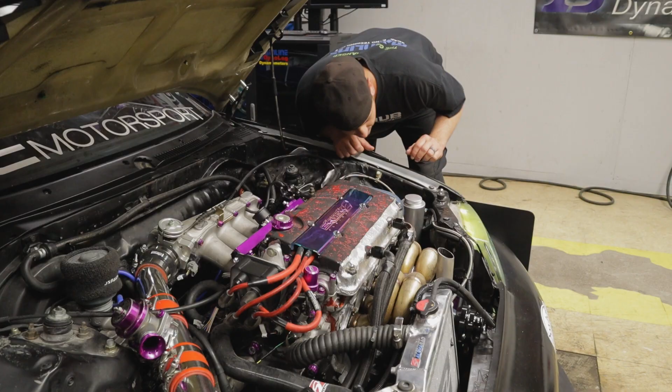Alright, so this is a Turbo B series, Hondata S300. What makes this one a little bit more interesting is it is a time attack car, so it needs to be able to go around a racetrack for extended periods of time, not just down the drag strip. And it is 12.5 to 1 compression with stock sleeves. So hopefully we can do all of this without shooting the crankshaft out of the bottom of it. Boost controller's mounted over here and ECU's over here, so just gonna run a couple wires over there real quick.

So inside the car, the boost control is going to go to A11 for the ground side, A25 for the power side, and then the wideband is going to go to D14. You can't really see in here, so I'm just going to hook a couple wires up real quick. Alright, everything's all wired up. Let's test it, make sure I didn't screw anything up. Battery's dead. Hopefully you can hear it pulsing.

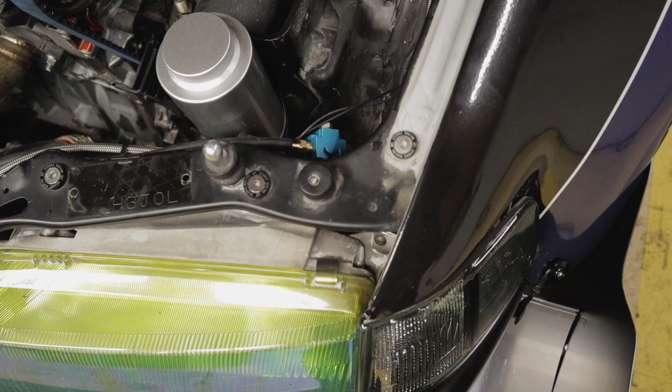Alright, I guess we'll drain the fuel, throw some E85 in it, and make sure it starts, runs, all that good stuff. And I don't think I'm going to have enough time to finish this today, so I might move the dyno forward, maybe. Yeah, I think I got another Honda coming next, so I'm going to move the dyno forward, get it set up on the dyno, hopefully get started on tuning it today, and then probably finish it up in the morning. Looks like the distributor is 20 degrees out too, so maybe we'll set the timing first. Yeah, let's drain the fuel, throw some E85 in there.

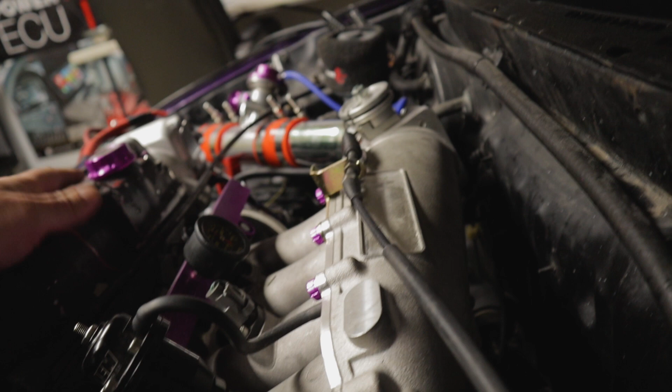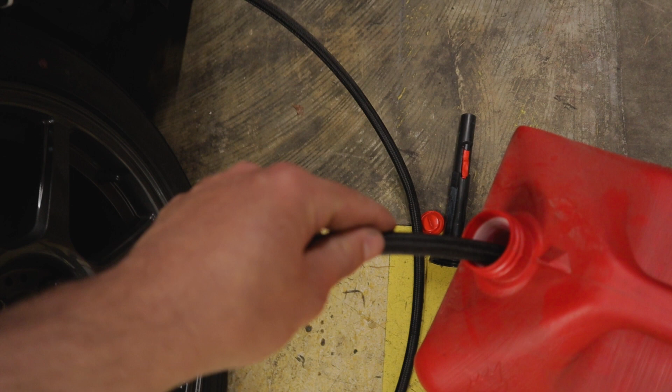I feel like I have $100,000 in lines and fittings that I just used to drain gas tanks. I'm not really a big fan of fuel pumps being on switches. I prefer for the ECU to control it. This one is on the switch, and it's going to be super convenient for draining the tank, minus the dead battery. Sounds weird. Kind of sounds like a dog drinking water. Alright, we'll just let this drain and then throw some E85 in there, see if it'll start. Stinks.

Alright, I'm going to try and start it now. It's got obviously the E85 in there. Change the fueling, change some idle settings, change a bunch of other crap. I don't know how well it'll start and run because all the fuel lines and stuff are still going to have 93 in it. And even when you drain the tank with the pump, there's still a little bit of residual 93 in there.

So locally, most of the E85 has been testing about E70 because of all the stuff going on in the world, and then we have only 5 gallons of E85. So probably in, I don't know, the E60 range. So assuming it'll start and run, might have to give some throttle, keep it going, but we'll dial it in once it's up and going. So let's see what happens.

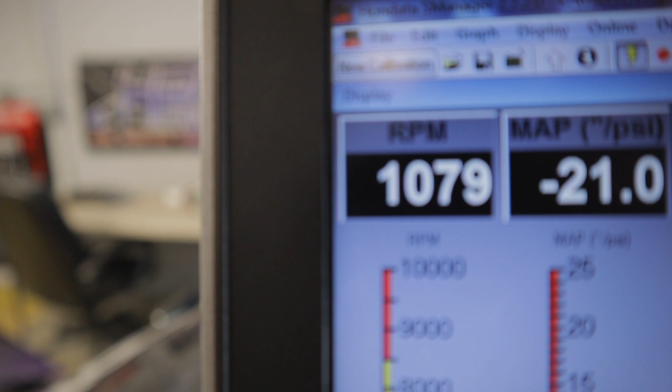So far so good. That was easier than I really expected. Just changed one fuel setting and then everything was up and running. So the fuel is definitely not quite as close to E85 as I'd like, but kind of is what it is. Now I'll move some stuff around, move the dyno, set it up on the dyno, and we can start tuning for real.

The 5-volt output for the wideband doesn't seem to be working. If I had to guess, there was a couple of gauges that all had kind of the same output wires. I probably somehow managed to grab the wrong one. So I'm going to check into that real quick. And hopefully I just got to swap one wire. Yeah. Yeah, so it turns out I'm just a moron. So everything's working now. Good to go.

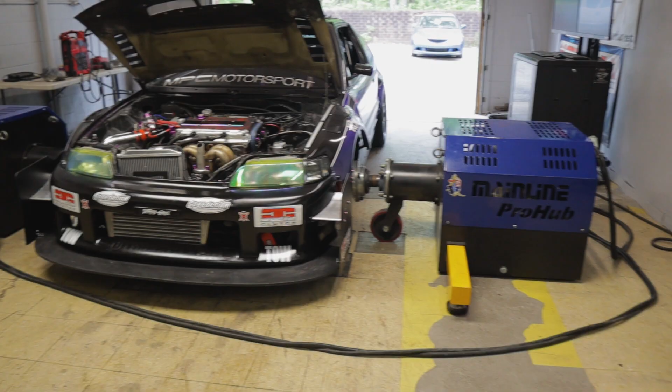Probably not going to be able to fit a jack under that. Alright, got it all set up. Next problem is this hood is so flimsy. I'm pretty sure that the dyno fan is just going to rip it off the car. So in an attempt to keep it alive, I'll take that off and just set it off to the side. Better safe than sorry, I guess.

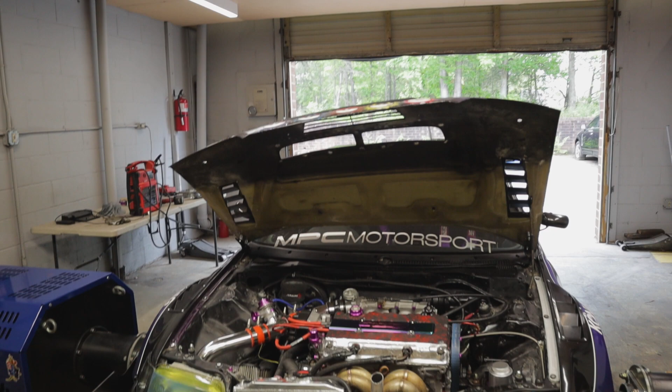So I actually don't physically fit in this seat. I can kind of wedge myself down in there, but then my legs are so cramped together I can't move them and I can't use the pedals and stuff. So I'm not 100% sure how I'm going to do this. I almost need to hire somebody that's super skinny for the day and make them drive it. Yeah, this should be interesting. Guess I forgot to mention it's right-hand drive too.

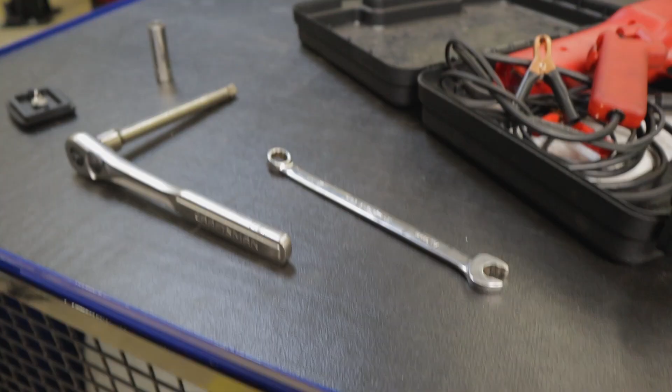Step 1. I'll go ahead and loosen this while I wait for my piece of junk computer to start. Everything's harder with one hand.

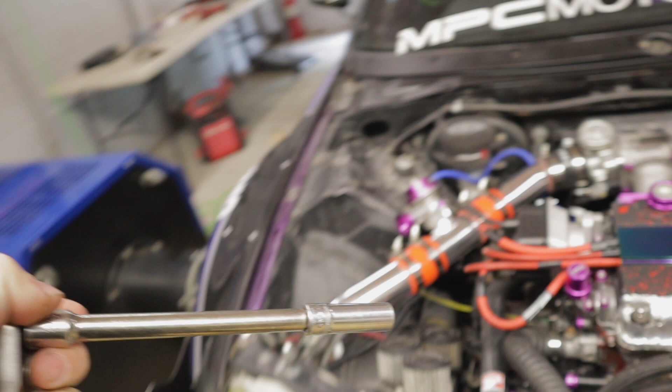It's illegal to put anything 13mm on a Honda. I have to call the FBI. No good.

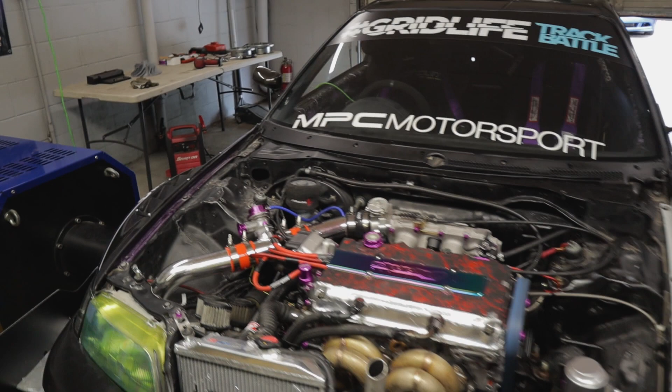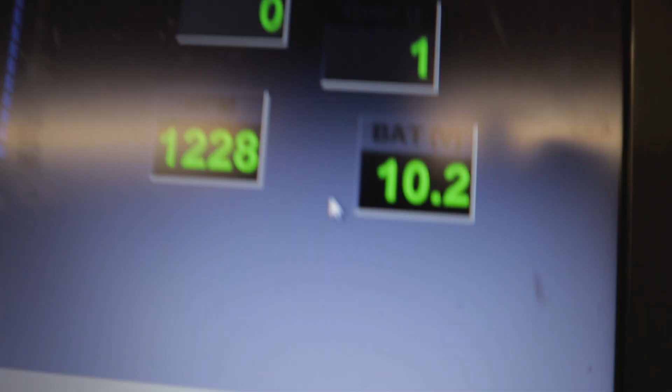Timing's off, as far as it looks like. It's probably going to idle a few hundred RPM higher now. Cold start seems to be right on the money. Fired right up, idles on its own, and it has no idle control valve, so it's super limited on what I can do for idle. But hell, I can't complain with that. So let it warm up, set the timing, and try to figure out how to get my ass in the seat. Alternator's not working. That might ruin everything.

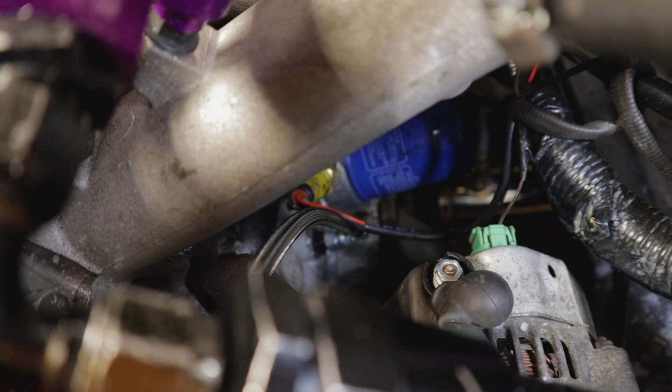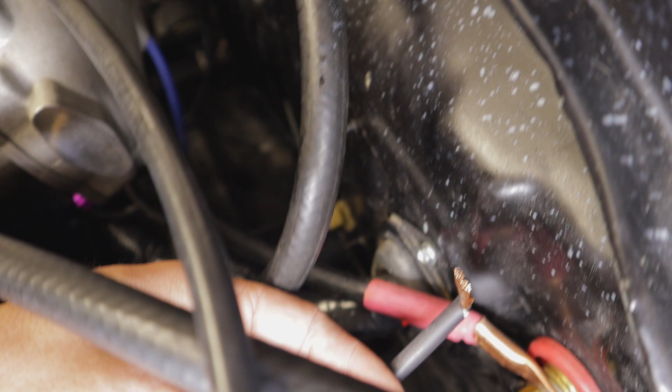It's basically freaked everything out. Nothing works anymore. So this isn't good. So I have 12 volts going to the trigger wire, but we do not have 12 volts going to the post. And we have 12 volts coming through the firewall. Oh, that'll do it. Awesome. I didn't really feel like changing an alternator, so I'll take care of that real quick. Alright, back in business, but check this out.

I think we should definitely tune it with the lights out. This is awesome. Making some crazy noise coming from these big manifolds. Just happened to notice the starter wire's loose. Maybe that's contributing to some of the charging issues too.

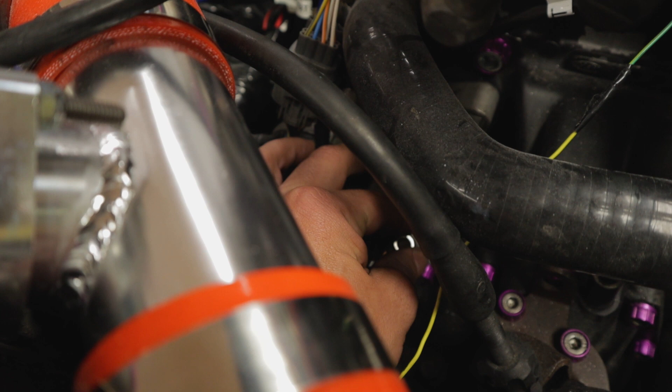Alright, let's set the timing. I'm sweating to death with a hoodie on and then freezing to death with a t-shirt on. I can't win.

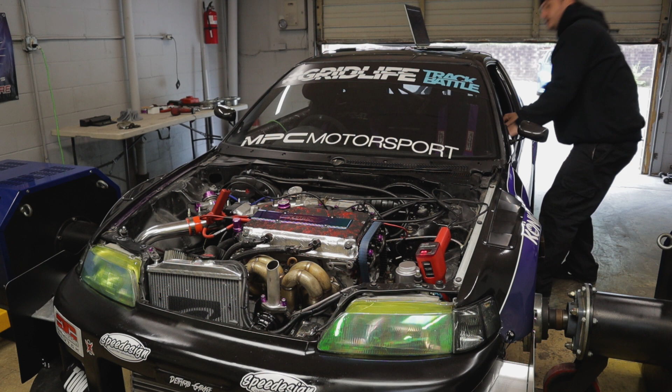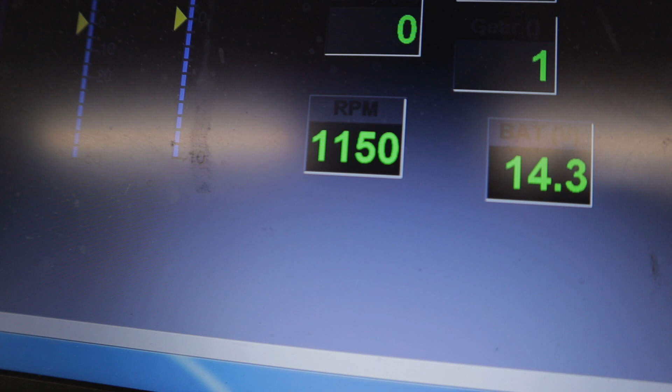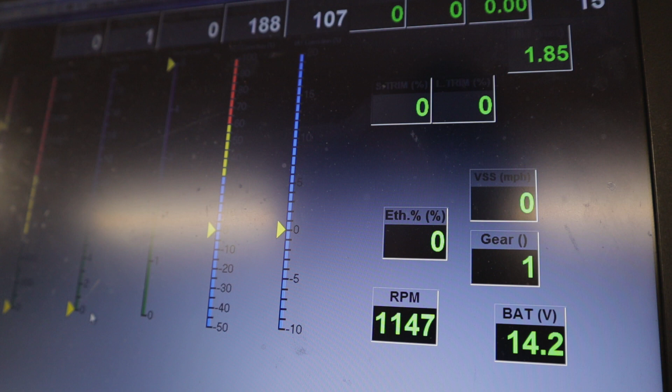Still like 120, 130 degrees, so I'm gonna let it warm up a little bit, and then set the timing. I'm not sure if you can see, but it's smoking like crazy. Hopefully it's the turbo, not the motor. Fueling's pretty close. Voltage is working again. Idle is a little high, but since there's no idle control valve, it'll actually cold start like this. So on a Honda, a little bit higher idle RPM isn't a big deal, whereas on a V8 car, especially an automatic, it becomes super annoying. So we're gonna roll with this.

I'm still not sure what's going on with that crazy whistling noise. It sort of sounds like the noise that sheet metal manifolds will make. Have a little leak somewhere. Fuel pressure's a little low too, so I'm going to go ahead and adjust that.

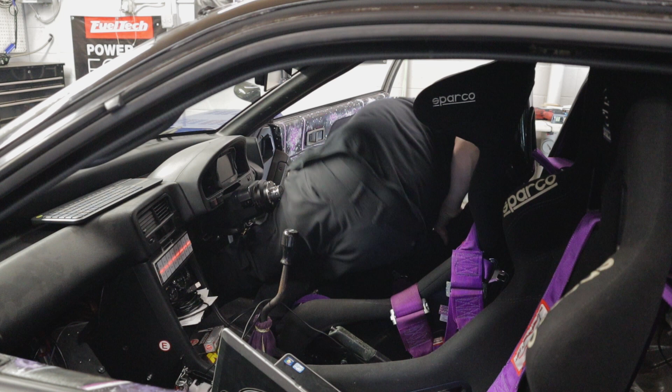Alright, this thing's too loud to talk over and too hard to get in and out of to really show what's going on with all this part throttle stuff. But really it's pretty uneventful. Just holding the dyno at different RPM points and going through all of the cells in the map.

But so far so good. It's actually running real good, responding to what I'm telling it to do. So I might just touch a little bit of that up, and then we'll start making some full runs, and I'll walk you through what's going on with that a little bit better.

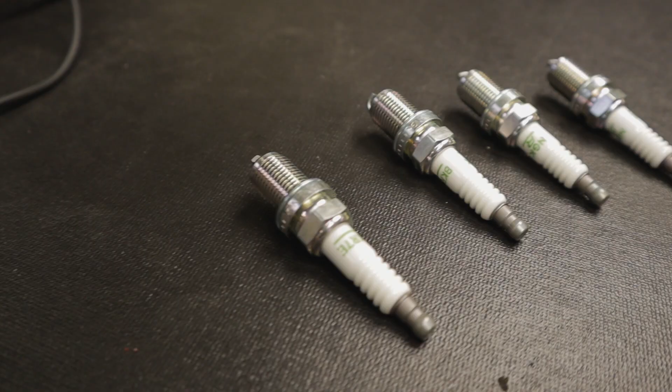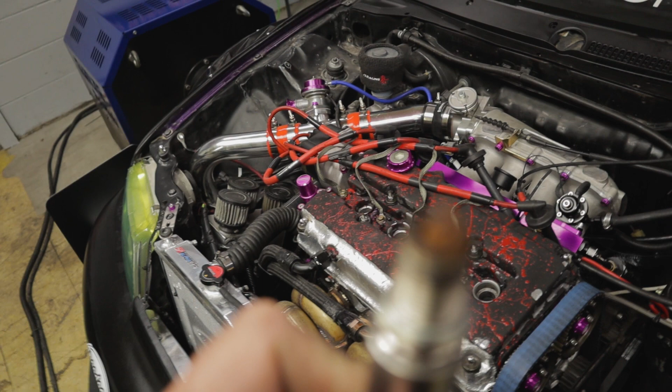You ever seen a spark plug when you run octane booster? Our camera won't focus, god damn it. They look rusty. It's kind of crazy.

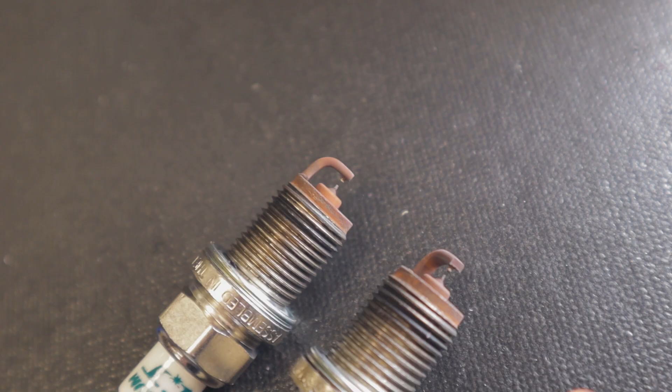I'm not sure how well you can really see this, but it's like half of it. The thing won't focus worth a crap. It's like on the ground strap itself. So it totally explains the misfire. I haven't put enough load on it or even done anything with it really yet to cause anything like that.

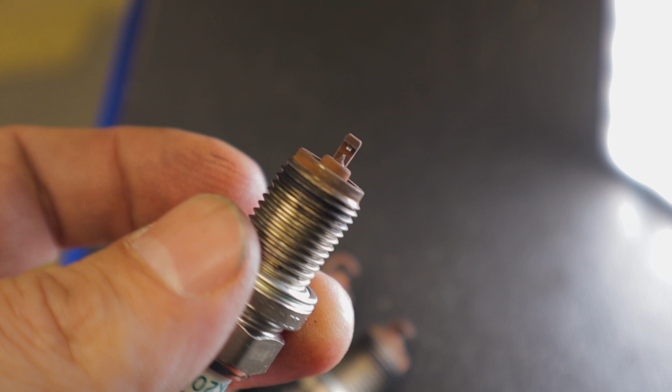I do know that this thing popped a motor previously. I wonder if these are the plugs that came out of that motor. I don't know. Throw some new plugs in it and make a pass or two and see what they look like. It's kind of crazy.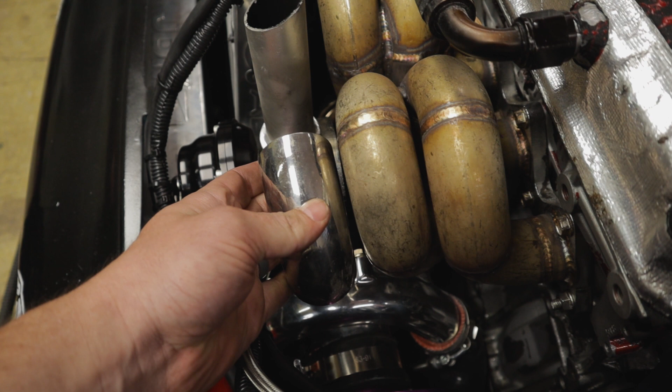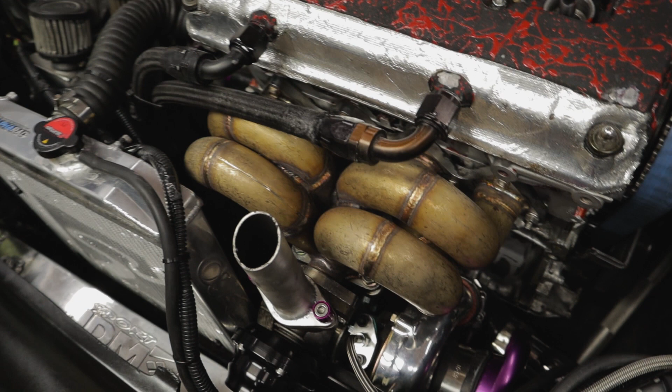So while changing spark plugs, cut my shin off on that and my ankle off on that, but actually noticed that the turbo manifold is using 1¼ inch schedule pipe instead of the typical 1.5 inch. So it should help actually quite a bit with spool up in the low end, and I don't think at these power levels it'll affect anything top end, but it's pretty rare to see on a Honda.

Alright, it's got new plugs in it. They're gapped to 18 thousandths, and I'm gonna make like a little baby pull and pull a plug or two and see what it looks like, because that's different. I've never seen anything like that before. That definitely seemed to clear up the misfire, as expected, I guess.

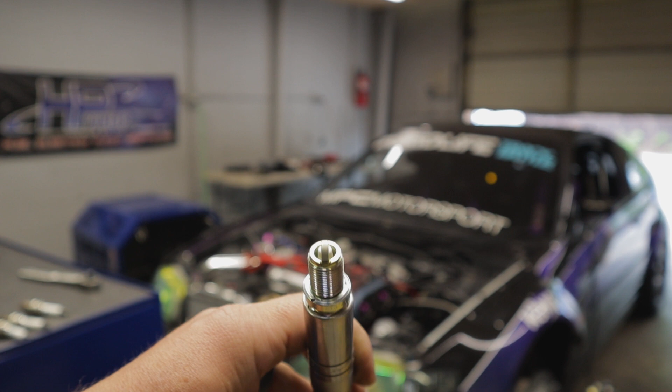Everything looks good there. Go ahead and pull them all out for the hell of it. That looks good. It's so hard to get in and out of. I'll just make the changes from this side of the car. So he's making about 10 pounds of boost.

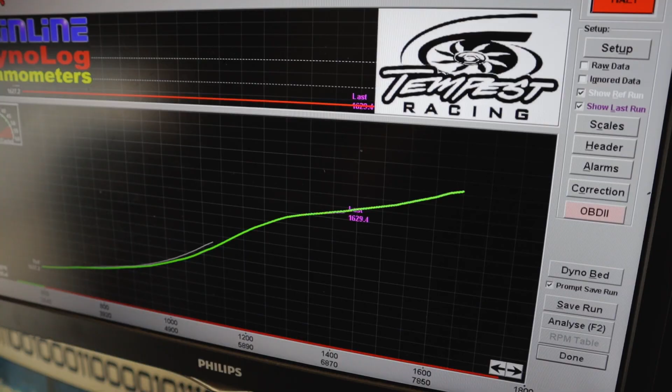A little lean up top, got to take care of that. I wanted to try and throw a little timing in it on this run, but the fueling was leaner than I'd like up top, so I'm going to smooth that out. I mean, in theory, put some fuel in, probably drop a couple horsepower. So don't really know what the timing's doing. And I don't remember what I was going to say.

Oh, the fuel curve looks a little weird on this one. Another reason I'm just going to baby step into it. It's a whole lot of compression for stock sleeves, so I don't want to make any big errors and kill everybody. So let's try one more with the timing the same, changing the fueling, and the boost controller is completely turned off. So I'll try this now.

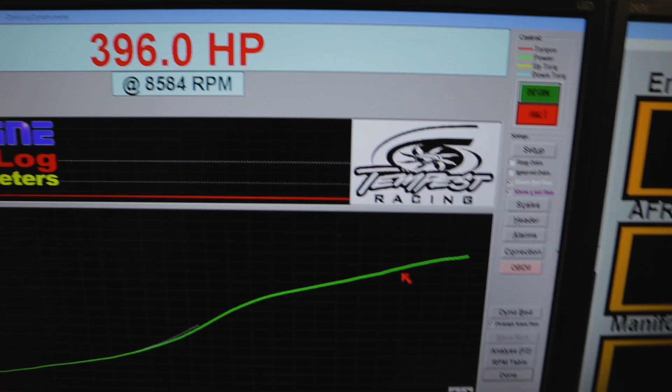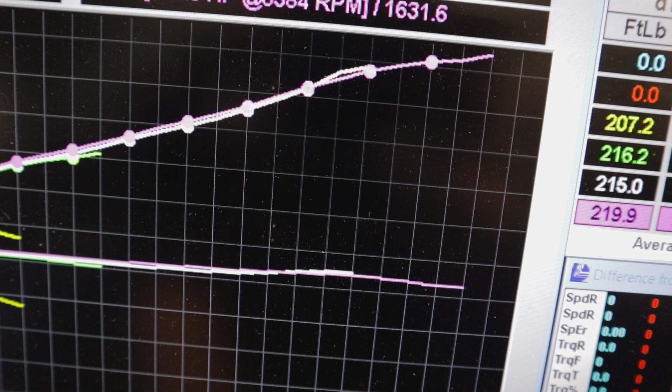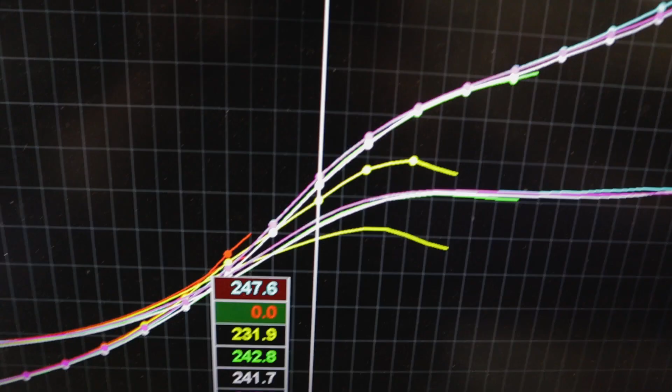Thing's doing pretty good on power. See, leaning it out, the white run maybe was potentially going to make a little bit more power, but purple will keep the motor in the car, so we're going to roll with that. Timing basically did nothing, which is kind of surprising. I was expecting a little something. Plugs look good, so just going to take that timing back out and keep going.

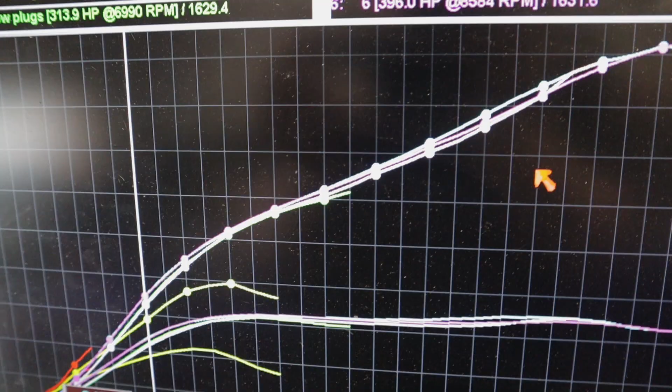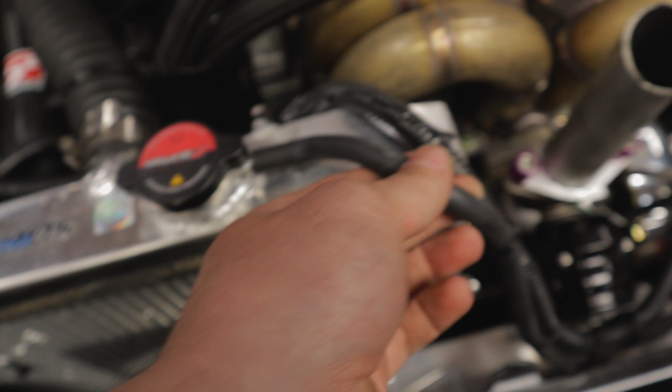I don't know why I'm touching this like you can feel what I feel, but it almost feels like the thermostat might be stuck. It has like some super squishy hose for the radiator overflow, and it popped the hose out. You can see it's like not tight at all. I guess you can't see. So I don't know, this might be the end of the day for this one. I'll investigate a little bit further. Really, I just need to make like one or two more runs and I'd be happy.

I let it run for quite a while. Everything seems okay. I think I'm going to make one more run with the boost controller turned on, and just throw it at like 40% duty cycle, which might make it go up 1 or 2 psi, and see if we can break 400 real quick and call it a day. But it's running good.

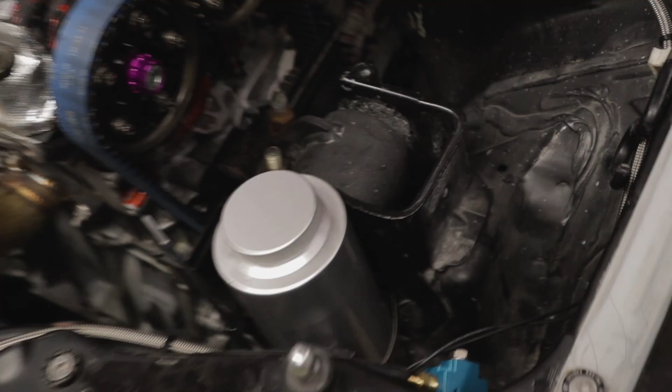So the coolant overflow tank doesn't have a vent in it. So even though there's nothing in there, there's just heat, so there's tons of pressure. So that's why that hose blew off, so that's good to know.

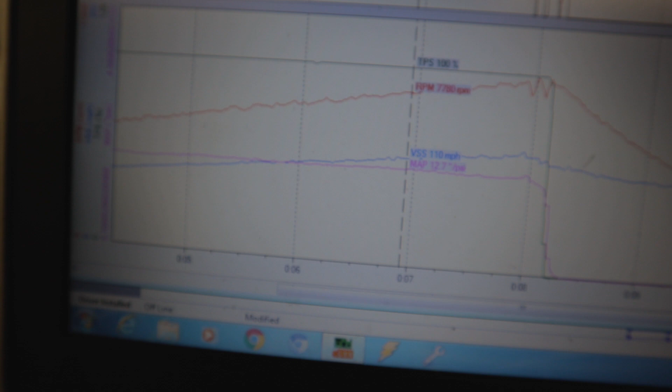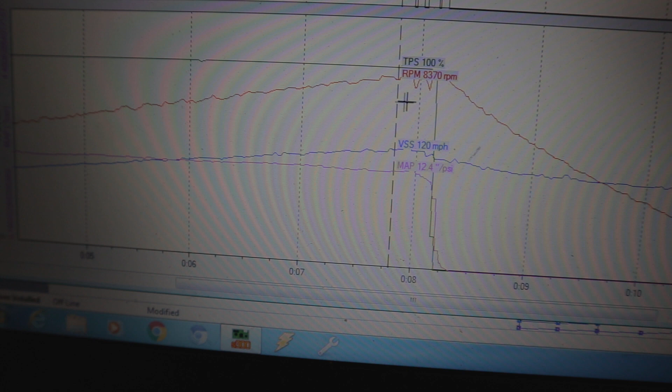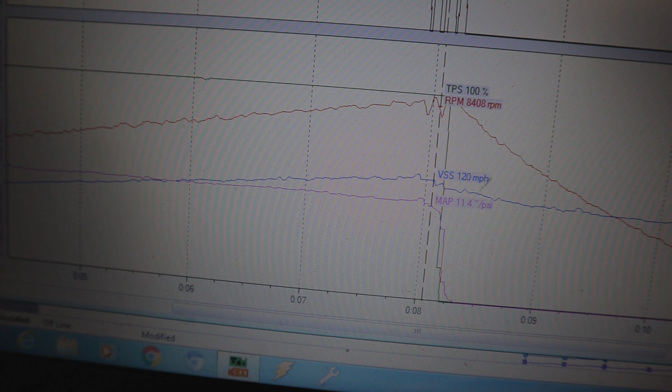So that was basically 1 more psi, 12 and a half pounds. I was watching the dyno screen, and if I revved it higher, it would make way more power, but it's got stock sleeves in it. Hit the rev limiter pretty hard on that one, whoops. And then our injector duty cycle is still about 88% or so. So the 1 psi was really just for fun.

And then here's the difference with the 1 psi. Looks pretty drastic on this. So this thing definitely wants to make power. Just need a bigger fuel system.